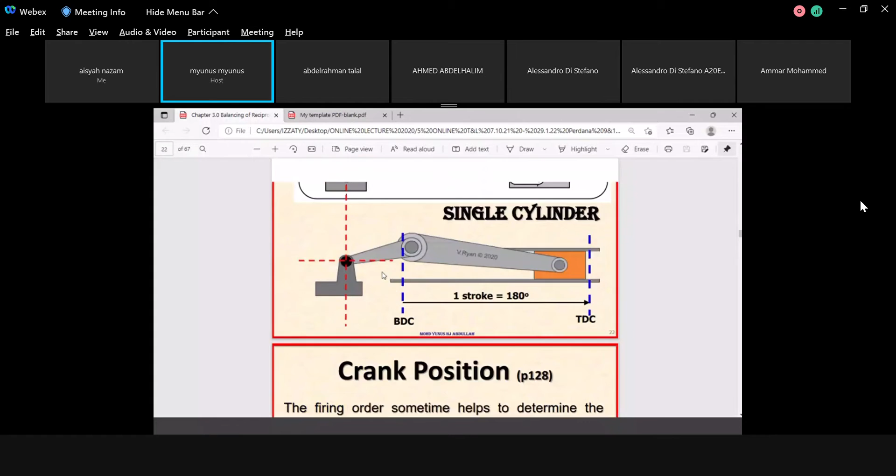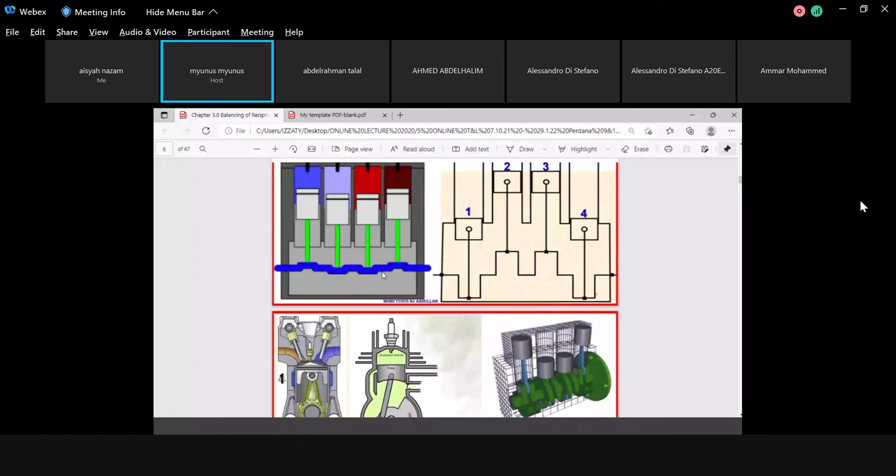This one, yeah. So before we pursue this one, as usual, I'm going to share with you, or recapture the thing that we studied last meeting. So what I intend to share with you is the whole thing that we are going to talk about, until the solution or the example, how to solve the problem. So I'm going to start with this one just to recapture the thing here so that you can refresh what we studied earlier.

Okay, so we are basically talking about the inline engine. Our aim now is to check whether the engine is typically balanced or not, and we are going to focus on the inline engine first. The next couple of lectures we are going to look at another type of engine, starting with the radial engine, and also the V engine.

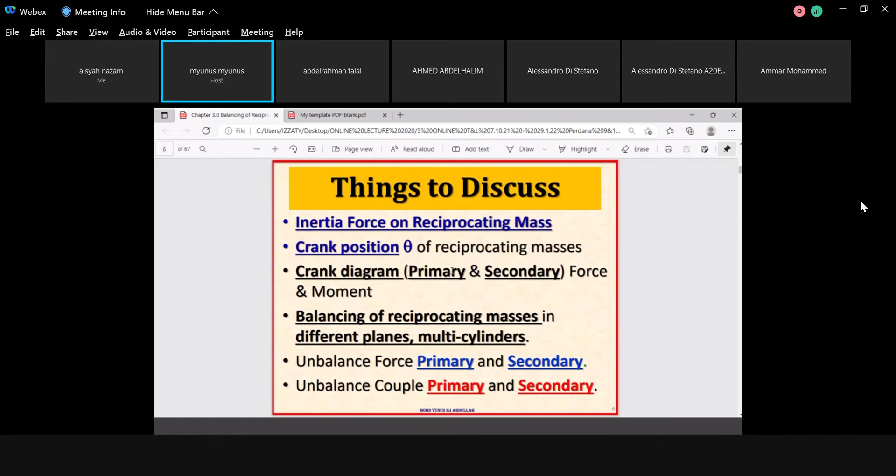Okay, I'm going to use my blank template here to basically discuss the things we already discussed. Okay, so we are basically in the middle of a discussion on the reciprocating mass, balancing of a reciprocating mass. This one is reciprocating mass.

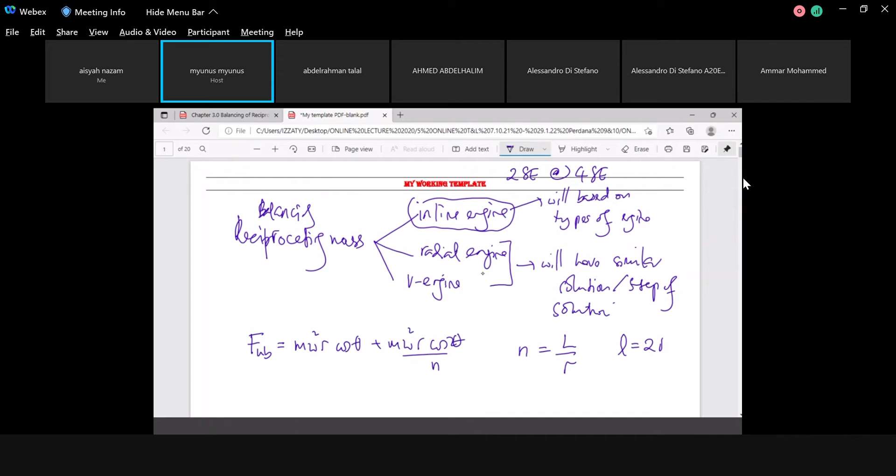Okay, so from this equation, you know that you have two terms. This one we call F primary, equal to M omega square R cos theta. This one we call F secondary, equal to M R omega square cos 2 theta divided by n.

Okay, so you have another one, because you're talking about multi-cylinder, for example. So you have this M unbalanced. This will be exactly the same here. You will have MRD omega square, sometimes I put R in front, sometimes I put R together with MR, doesn't matter. So MRD omega square cos theta, plus MRD omega square cos 2 theta divided by N. And here you have two parts again of the equation, this one and this one.

We call this one M primary, isn't it? M primary, sometimes M can also be known as moment, sometimes couple. So your M primary is equal to MRD omega square cos theta. Here we call it M secondary: MRD omega square cos 2 theta divided by N.

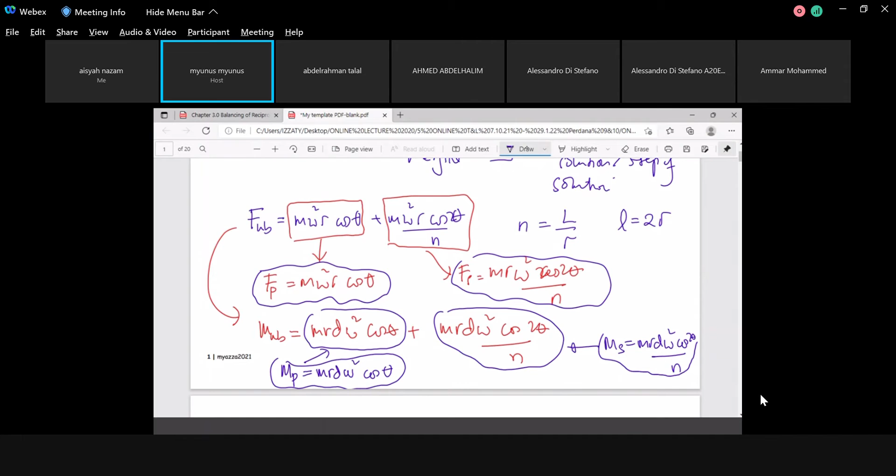So if you look very carefully, you have 1, you have 2, you have 3 here, and finally you have 4. So you have 4 equations. So the solution will deal with 4 polygons.

Okay, 4 polygons. If you want to do it analytically, you have 4 major equations. How do you write it? 4 major equation.

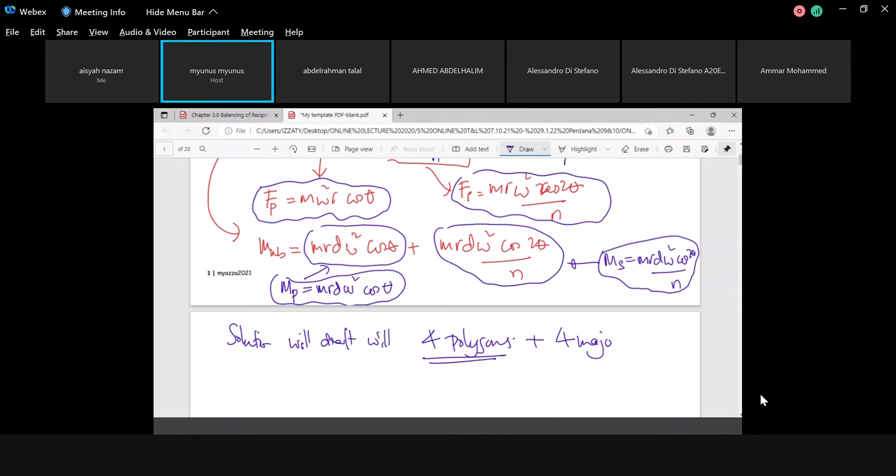Okay, so I'm going to talk about what the polygon is at the moment. So the polygon will be the polygon. You have one will be what you call the primary force polygon. Then you have primary couple. This one you have another one, secondary force. Then you have secondary couple.

You have 4. This one, of course, versus theta, versus 2 theta, because sorry, both are versus 2 theta. Sorry, I stopped momentarily. This one is versus theta also. This secondary will be versus 2 theta. This one versus 2 theta.

So we need to know or perhaps define what theta is. So theta is crank position. Okay, crank position.

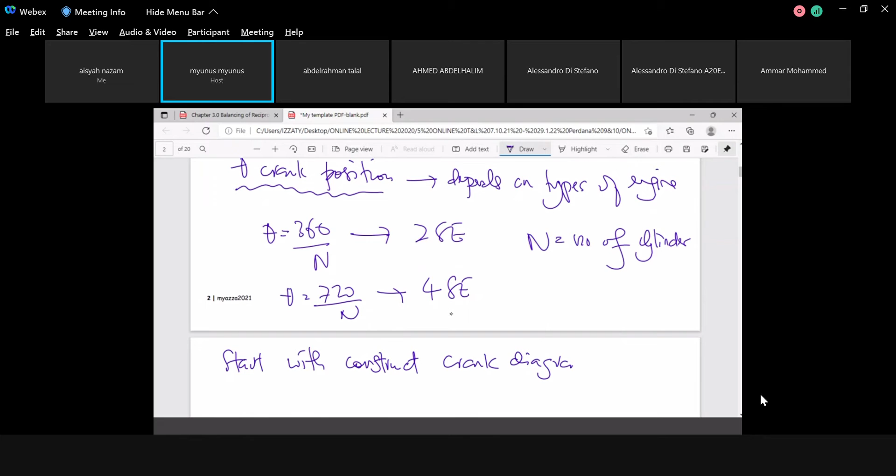So when you understand this, then the next thing will be very simple. So then we start with, remember, we start with constructing one crank diagram. This one is compulsory. Put it there, compulsory, it's a must.

Okay, so before you construct that crank diagram, you need to know something. What do you need to know? Remember, anyone? What do you need to know before you construct the crank diagram, class? Anyone? I think everyone attended the lecture last week. It is not very far, only last week, isn't it?

Yes, correct. You need to know FO, firing order. Again, firing order is also compulsory. You need to know, it's compulsory. If there's no firing order, for example, then what do you have to do? You have to design your own firing order. How to design? I will discuss or share with you later on.

Okay, now, so what is firing order? Firing order is basically the sequence of power being delivered. Sequential means you have four activities. What are the activities? These are the activities for internal combustion engine. Yeah, what are the activities?

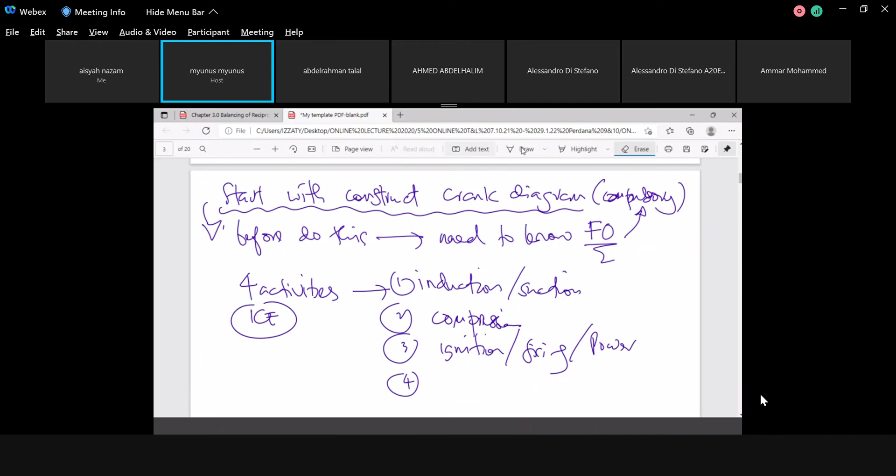Compression is correct, combustion is also correct. Number three, then this one, ignition or firing. Then number four, this one, you have power, oh sorry, ignition or power. This one, exhaust. This one is combustion. This one is exhaust.

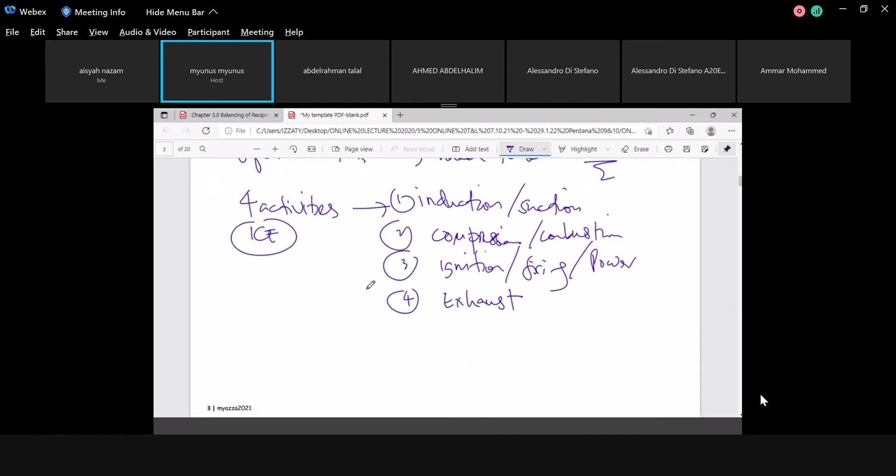Okay, so these are the four activities in the internal combustion engine. So now you already know what firing order is. So who decides the firing order? The engineer, or perhaps the person who designed the engine, is the one in charge, or responsible to decide the firing order.

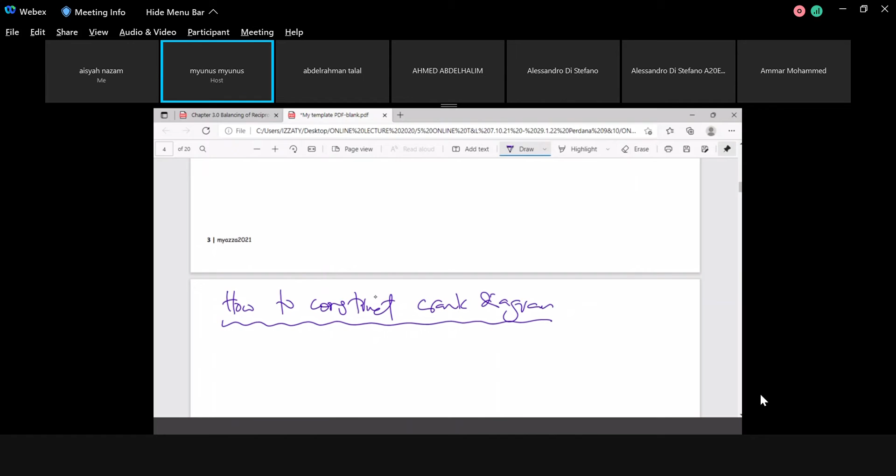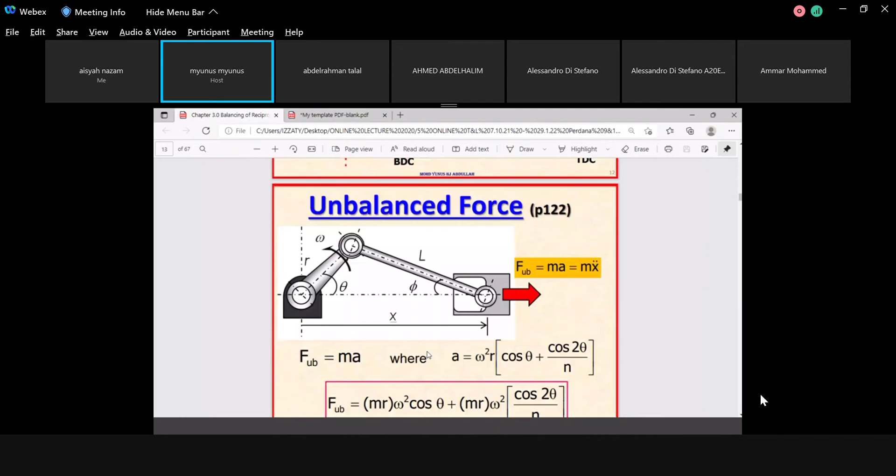Okay, now then we start with what I'm going to share with you now, how to construct the crank diagram, because this is very important. Okay, let's assume you go back to your notes. Let's assume that everything I explained here is in your notes. Yeah, don't worry if you didn't copy it, it's still okay. Just check your notes. Let's assume that you have it as such.

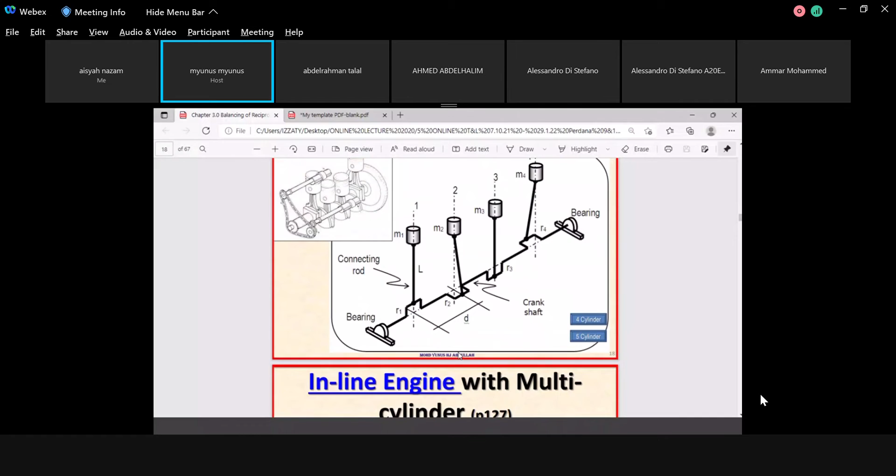You have this one on page, in your slide, slide 27, 28, 30, 31, this one.

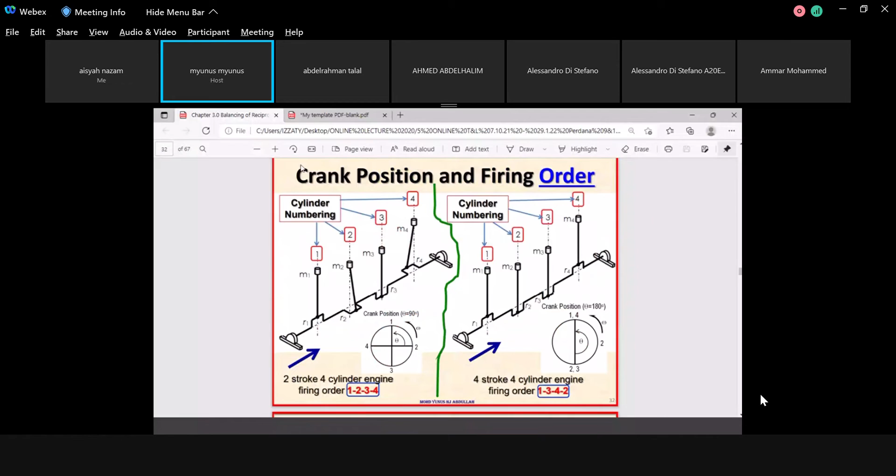We have 4 slides in one page because I tried to give you one page for one file, but it can't make it because the file is so huge. So you have this one.

So this is by firing order. Assuming this one, let's assume you have 2-stroke. Let's assume this is the given 2-stroke 4-cylinder engine. Firing order 1, 2, 3, 4. Don't bother about the firing order, because this firing order is given, or if it's not given, then you design it. How to design? I will explain to you later. So we have 2-stroke 4-cylinder engine with 4 cylinders.

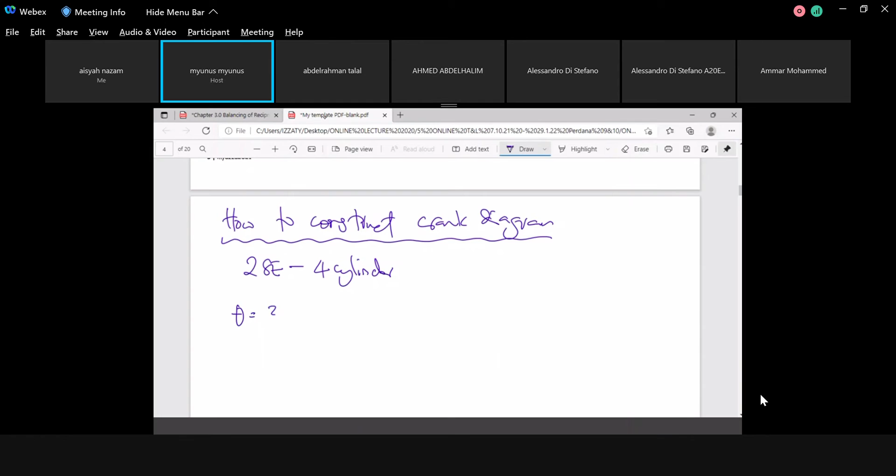So what you have, theta now is equal to 2-stroke 360 divided by 4. You will have 90 degrees. What does this mean? It simply means that if you have 4 cylinders, cylinder number 1, cylinder number 2, cylinder number 3, cylinder number 4, the arrangement will be 0, let's assume the arrangement be 0 here, 90 here, 180.

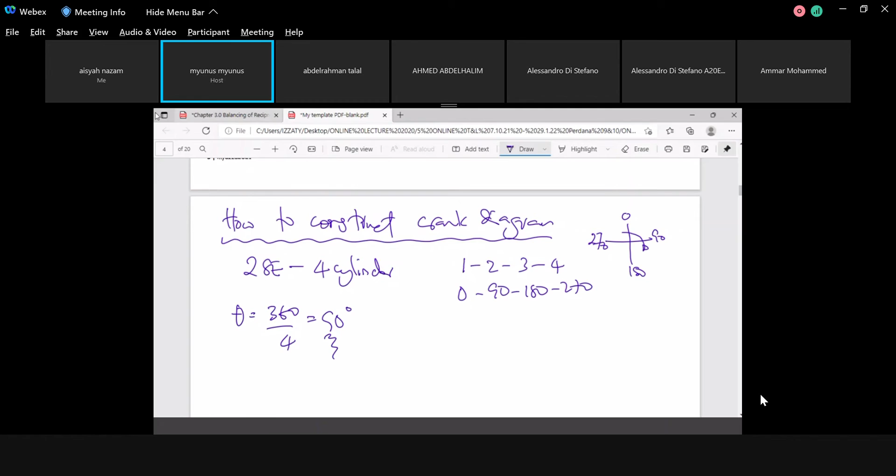This one is 270. Clockwise from the vertical, you have 0. The next one is 90, isn't it? So you have this one 90. The next one will be 180. The next one will be here 270. Am I correct or not? Yes or no? So that is the arrangement.

But this one is based on the crank. So the position will be as such. This one, look here, 90. Correct? 0 degrees, 90. This one is 180. This one is 270. If you look at from one end here, you will have this one: 1, 2, 3, 4. Am I correct? 1, 2, 3, 4. So that will be the arrangement.

So it's rotating clockwise. Why is this one our concern? Remember, when I show you the firing order, you need to know what the direction will be. So let's go back to the firing order.

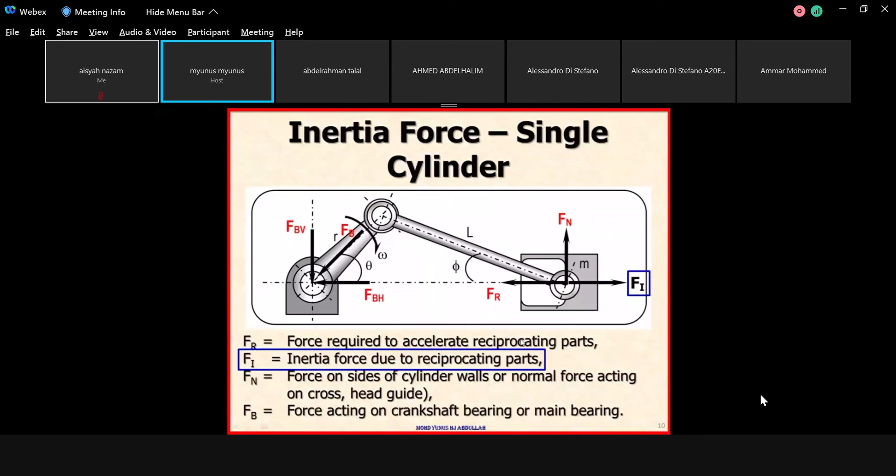If some of you might not have observed about the firing order, I'm going to share with you about the firing order. I'm going to open up the file and share with you the direction for the firing order. Remember, it's very important to know what the direction will be. If the direction is not given, for example, you need to decide on your own.

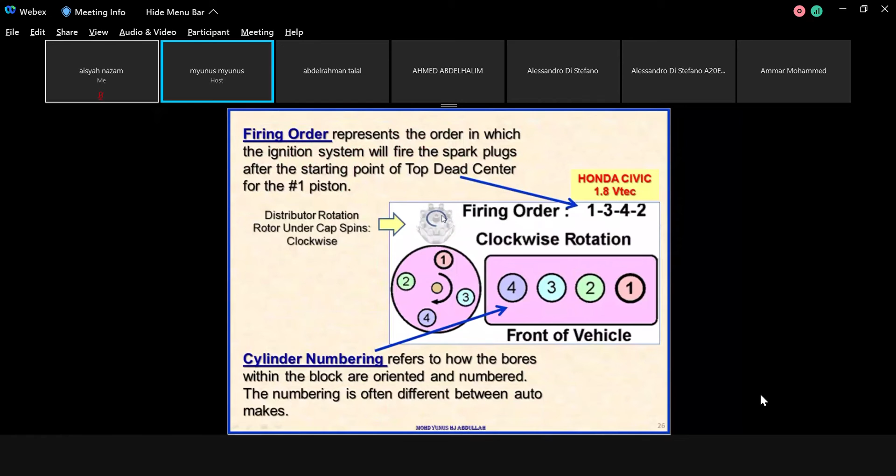Yes, doctor. Okay, look at here. This one also clockwise, the other one counter. So this is the direction. The direction must be given. If it is not provided in the question, for example, you have to make your own adjustment.

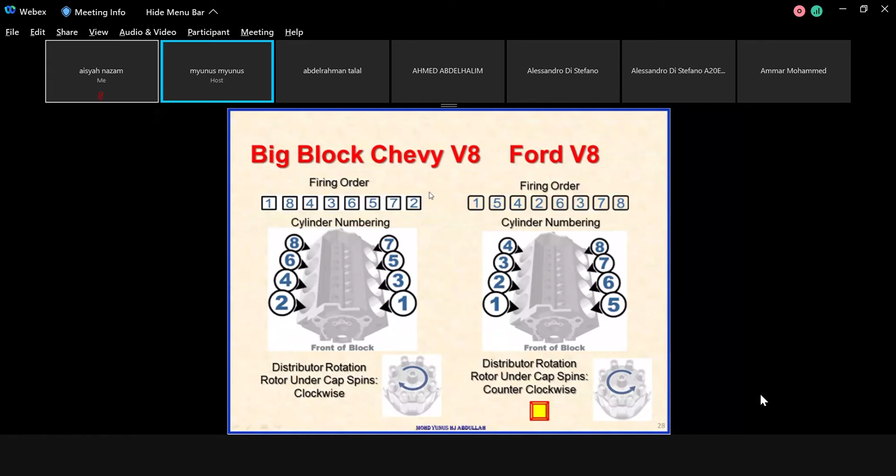I'm going to close this file and open up the other file so I can write on it. Okay, now, so perhaps it mentioned about rotating counterclockwise from your seat. So this will be the arrangement: 1, 2, 3, 4.

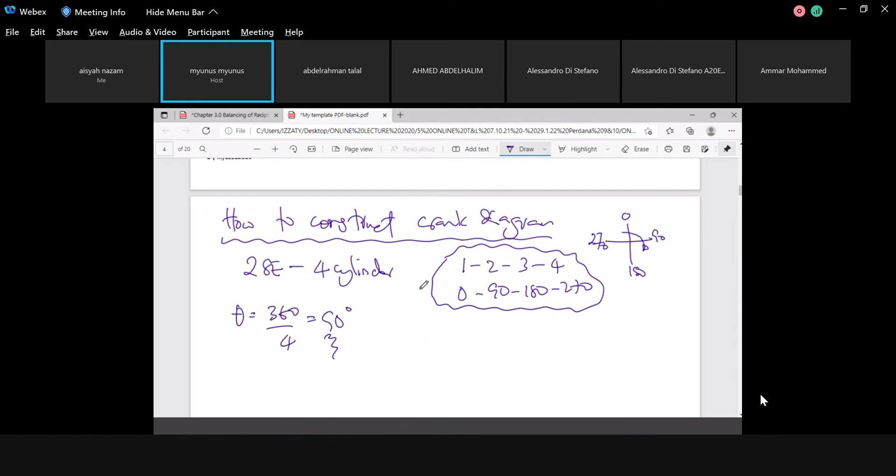Okay, so we go back to here. So supposingly, this one, you will have the crank. Somehow or other, you know that the firing order is also exactly the same: 1, 2, 3, and 4. So you have the same result.

This one, the firing order, yeah. So if you start with here 0, this one will be 90, this one will be 180, this one will be 270. So you can also put notation or a sign on your crank diagram: 1, 2, 3, 4, rotating counterclockwise from your seats.

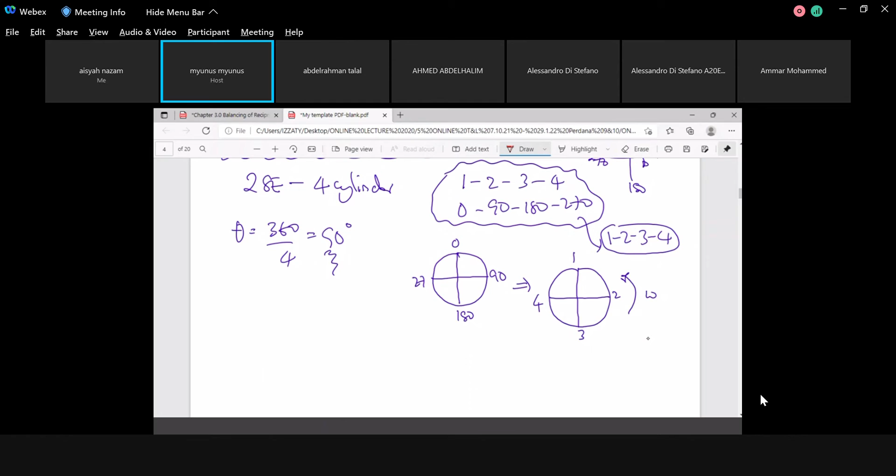So my equation, this is my equation now. Supposingly I change the omega, I'm going to put it here. 1, 2, 3, 4 just now, this one. Could anyone tell me what will be the firing order now?

Now I'll change the direction. So could anyone tell me what will be your firing order now? Anyone? So this will be the firing order. If you have this one, for example, because I changed the direction now, what will be the firing order now? Anyone?

Could anyone? 1, 4, 3, 2 is correct. It's 1 here, isn't it? Then this one to 4. Oops, sorry, I say 4 but I write 3. Sorry guys, this one here is 4, correct? The next one coming is 3. The next one coming is 2.

Okay, it's still 90 degrees, isn't it? It's still 90 degrees, 90. So this one is 90 degrees, 90 degrees, 90 degrees. Okay, so it is not very difficult. It is not very difficult.

So if you construct, for example, this one is not in our discussion. Let's focus on this one because this is not in your notes. It is correct, but not in your notes. Your notes tell you about this one. So if you have this one as such just now, 1, 2, 3, 4, rotating that way, so if you construct a polygon, for example, what do you have now?

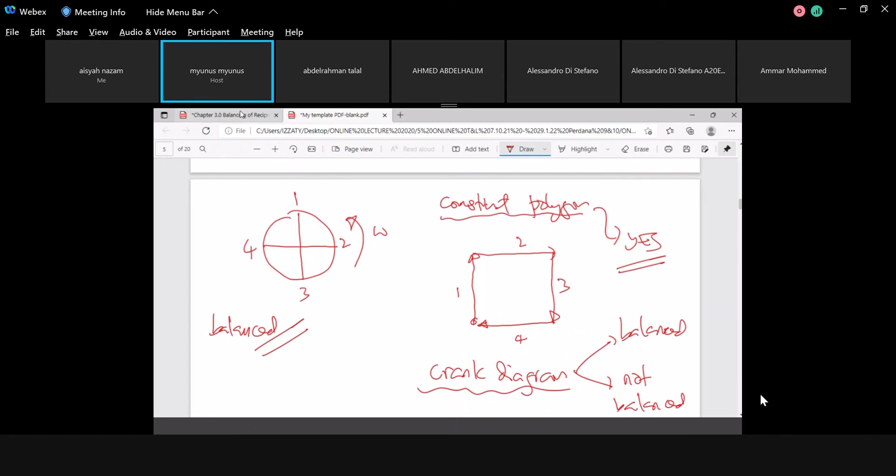This one is balanced. Okay, so you go to another one. This time around, you have a 4-stroke engine and 4-cylinder.

We go back to here. The next one, you have a 4-stroke engine. Let me change the color here. So you have a 4-stroke engine with 4-cylinder. So theta now is given by 720 by 4, so you will have 180.

So the arrangement will be the polygon. Oh sorry, it's not polygon. The crank diagram is not the polygon yet. Yeah, it's a crank diagram. So the crank diagram will be... let me change another color here. Okay, so the crank diagram will be the crank diagram now.

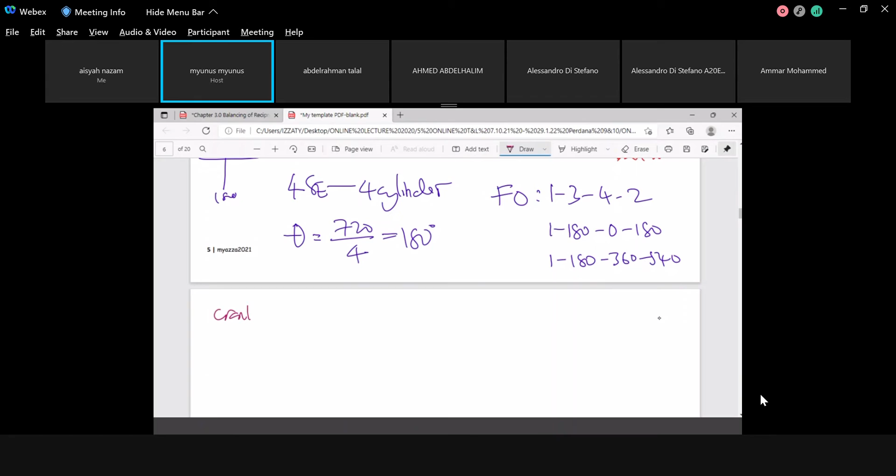So how is it? You have the crank diagram. Okay, then you have 1 will be here. So you put it here, zap, this one 1, your reference just now. This one is 90, right? So put your reference now: 0, 90, 180, 270. So you have 1, 180, 360, 540.

So you have 2, you have 3, sorry, you have to follow the firing order. So the firing order gives us what? 1, 3, 4, 2. So this one is 1, 3, 4. Correct or not? Correct or not?

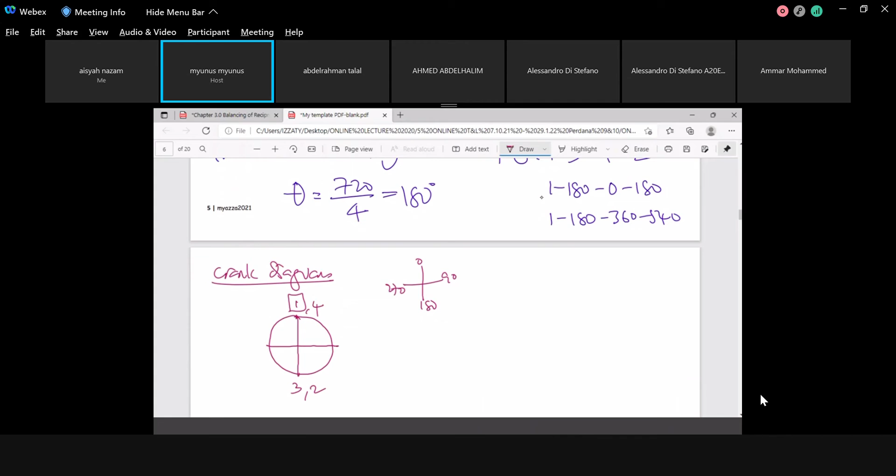And it's rotating what? So when will be the rotation now? So that is important. Clockwise or counterclockwise, class? My order is 1, 3, 4. So clockwise or counterclockwise? Hello? Anyone? No one interested to answer. So does it rotate clockwise or counterclockwise?

Counterclockwise, correct. This one is omega. Put it there, omega. Okay, now finished.

Let us now focus on this one. So how will be the position for the actual engine, or I mean the crank? So you are looking for one end here, so your eyes are here. Let's put it a bit thicker. So if you look at this, you found this one is 0 degrees, isn't it?

So the next one is what? The next one is 3 here. The next one is 4 here, isn't it? The next one is... okay, so 2 and 3, 1 and 4. Does it balance? Yes, it is balanced.

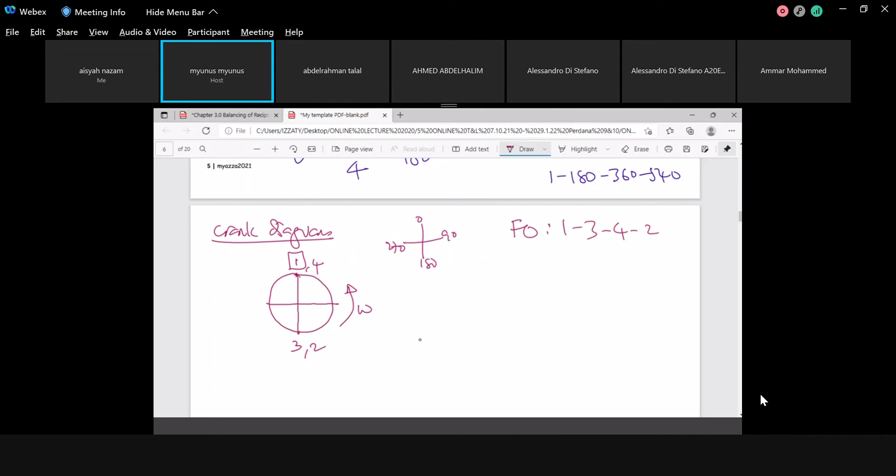So if it is balanced, how will your polygon be? We can start here. Your polygon will be 1, zap, start in the middle here, isn't it? Then number 1, then you have two choices. Let's say you have two choices. You can put here 1, quite a bit longer, yeah. 1, then you have another one, 4.

So then what you have is 3 will be pointing downward, 2 will be pointing downward, and it is balanced. Put it there, balanced.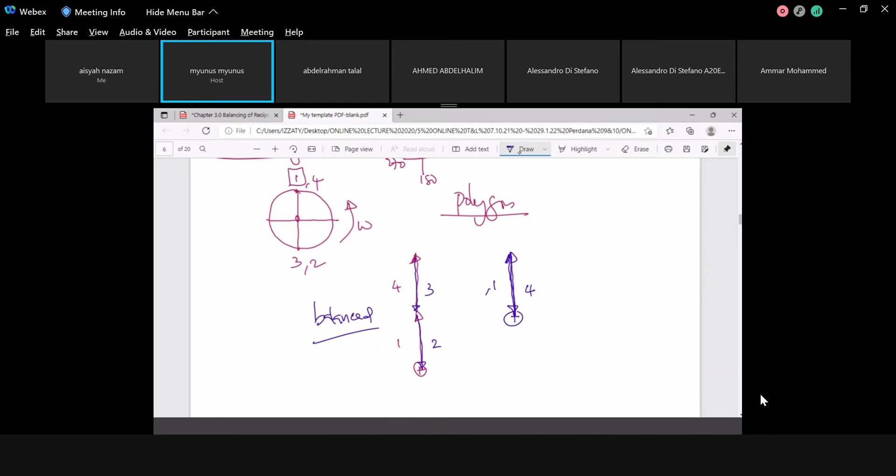Or it can also be in the form of starting point 1, then is 4, 4, then is 3, then is... okay, so now my polygon is also balanced.

To ensure that the one who checks your work understands what you're doing, don't do this one. The reason is, the minute you keep drawing on the same line, after all, if you have 20 cylinders for example, your paper will tear, isn't it? So what you have to do now is this one, which is correct.

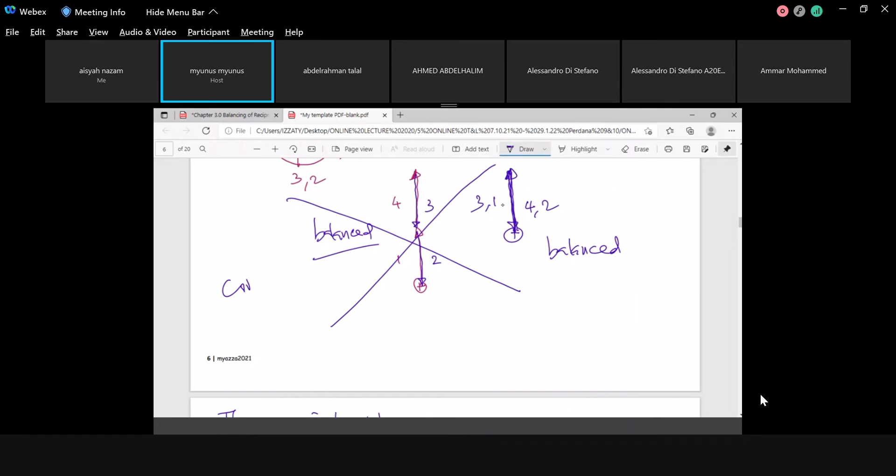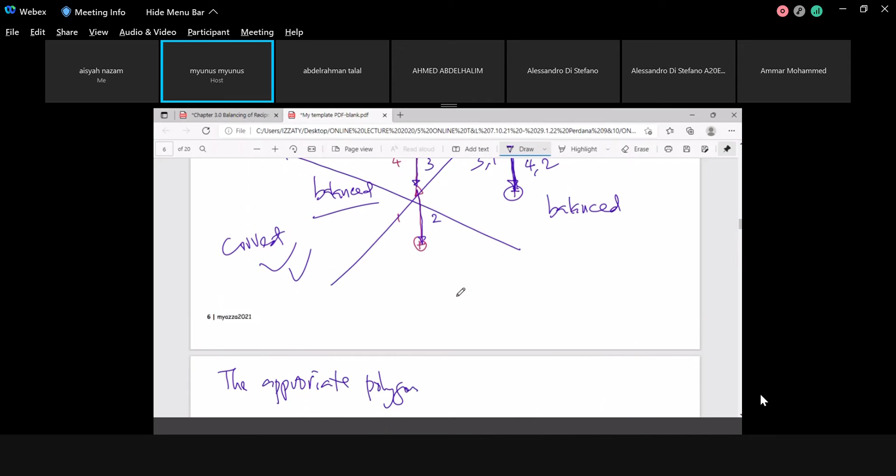I'm not saying this one is not the appropriate polygon. It is correct. But the one checking your work will find it looks so messy. If you have 16 cylinders for example, the appropriate polygon will be this one.

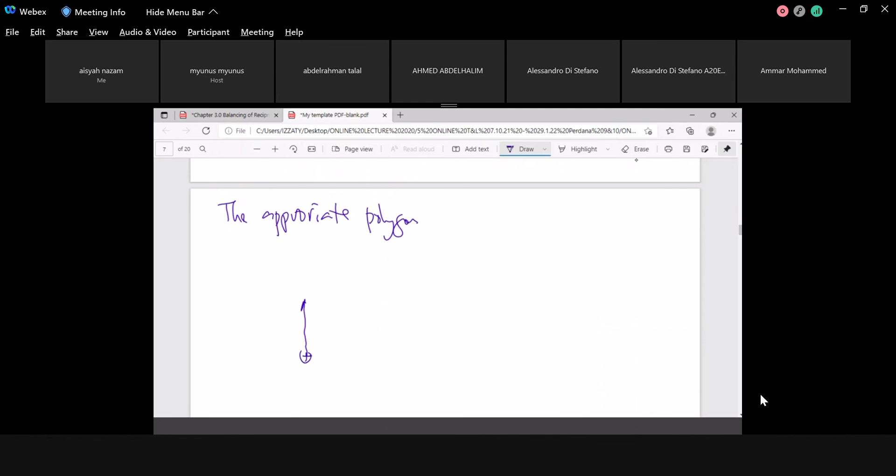Starting, number 1, number 4, then put it here, number 3, number 2. Even though these two lines are overlapping or superimposed on each other, you have to create it this way to ensure the one correcting your work understands. Or perhaps you can also do it another way: 1, the next one will be 3, go back here number 4, then this number. Both ways work, so you can choose either one.

It is called polygon. This polygon is not what you learned in secondary school. The polygon you learn in secondary school is different. What does the teacher tell you? Polygon must be at least what? What do you know about polygon?

Terminology - what do you understand by polygon? I don't want you asking whether this is basically not a polygon. Can anyone tell me in terminology what polygon means? At least what? You must have three lines. That is a polygon, isn't it?

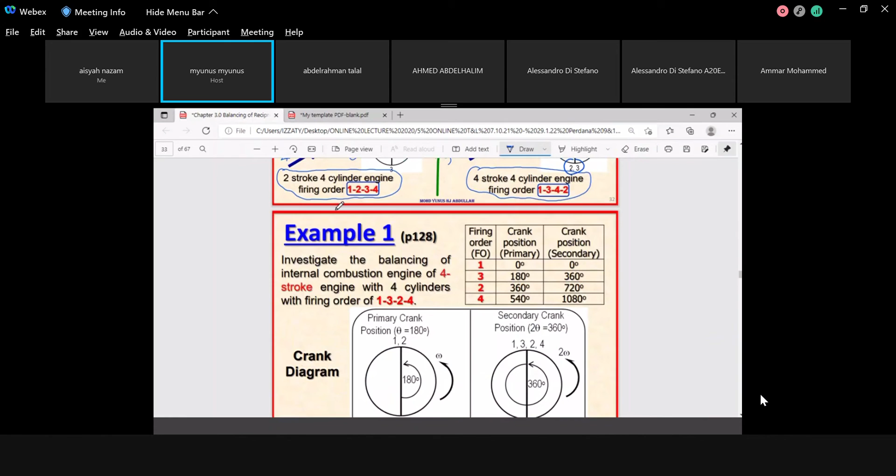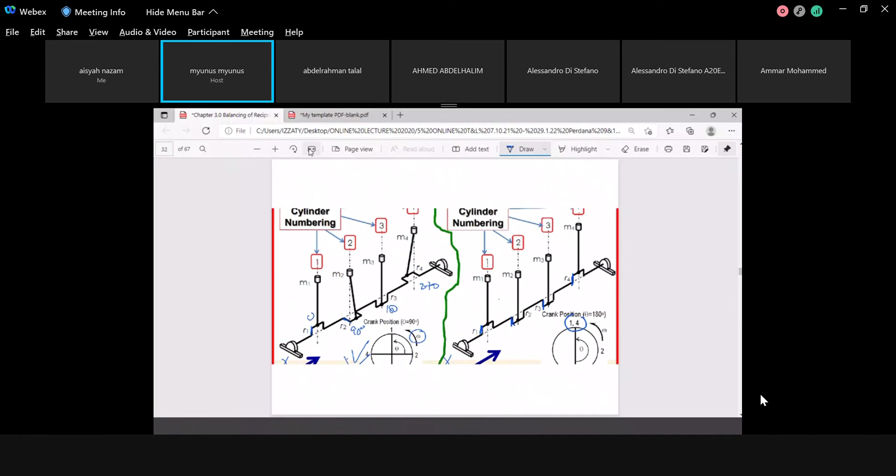This one is nothing much, you can put it in the form of a table. This is just to share with you how to construct the crank diagram. Now I'm going to construct this one again, but applying primary and secondary. Don't go to this one first - I'm going to share with you what happens with primary and secondary.

Start here. Listen up very carefully. We have a two-stroke engine, four-cylinder. We already calculated theta equal to 360 divided by n, and this is 360 by 4, which gives you 90. The firing order provided is 1, 2, 3, and 4. So you know all these are 90 degrees apart, and let's say the position is this one.

So how do you construct it? The crank diagram will be, look at here - this is the crank diagram. Remember the crank diagram just now? You have force, yeah, force primary. You have force secondary. We have another one for couple - also same thing, primary, secondary.

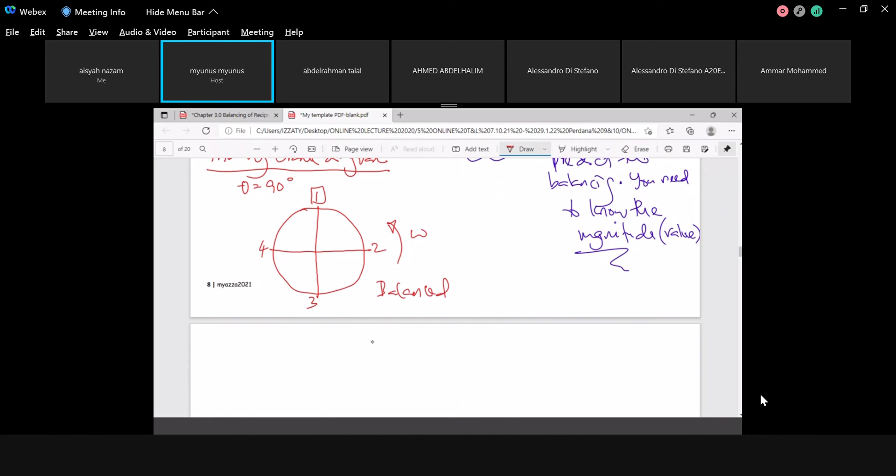Polygon you can construct on your own. For secondary, now secondary force.

So 2 theta is equal to 180, because the earlier part is theta, since we are talking about the primary. When you move to the secondary, it becomes 2 theta. The reason is if you look at the equation, F secondary is equal to mr omega square cos 2 theta divided by n. This is cos 2 theta due to secondary. The primary one, F primary, is equal to mr omega square cos theta.

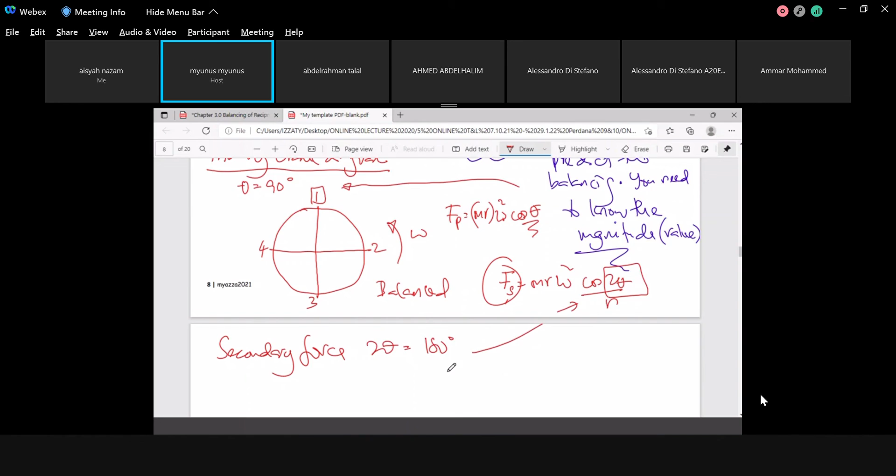That is, we have this one. This one will be theta. Okay, so how will be the polygon?

Same. This one is no longer omega, it becomes 2 omega. Then you have this one, what you done earlier. Cylinder number will be your reference. Now if you are talking about the firing order just now, 1, 2, 3, 4.

So now it's 180. The position for each crank will be 180. So if you start with 0, for example, so you will have 180. You will have another 180 is 360. Another 180 will be 540.

Isn't it? Yes or no? Yes or no? Yes, anyone? Could anyone else? Thank you, thank you, Tal.

So now, so you will have 180. If it's not 180, yeah, it's not 180. It is crank number 2. Crank number 3 will be here. Crank number 4 will be here.

And it is also balanced. So you have F secondary equal to 0. Your F primary also equal to 0. Your summation of F equal to 0. So there is no unbalanced forces acting on the engine.

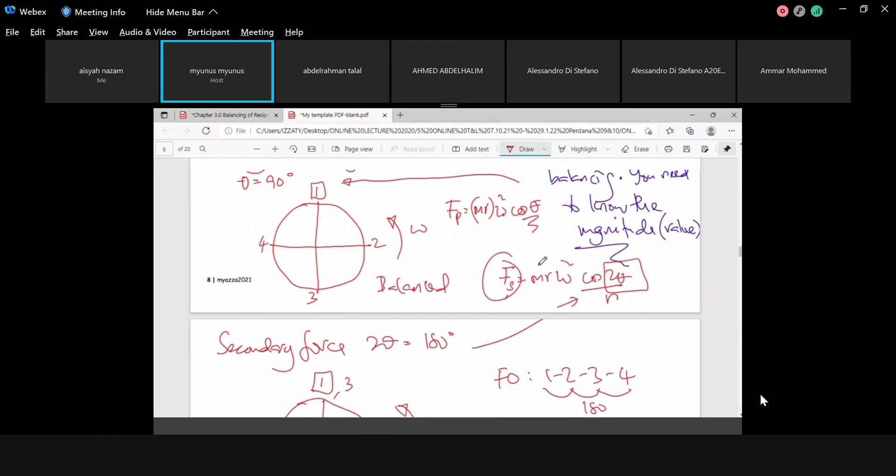Okay, so let us now make another one. This one, yeah, this one 4-stroke, 4-cylinder, of course. Your firing order is 1, 4, 3, 2. Am I correct? Put it there. Sorry, it is 1, 3, 4, 2.

Okay, so now the theta, as we done earlier, is 720 by 4, which gives you 180, right? And the firing order is this one. So everyone will be positioned at 180 for primary. So for primary, for example, you can start constructing a table.

This one is theta, this one is 2 theta, this one be your cylinder, or put it there, not cylinder, you can put it by firing order. Firing order, put it there, cylinder, firing order. What you have is 1, 3, 4, 2.

So for example, let's start at 0. Everyone will be 180 apart. You have one, you will have 180. Another 180 is 360. Another 180 you will have 540.

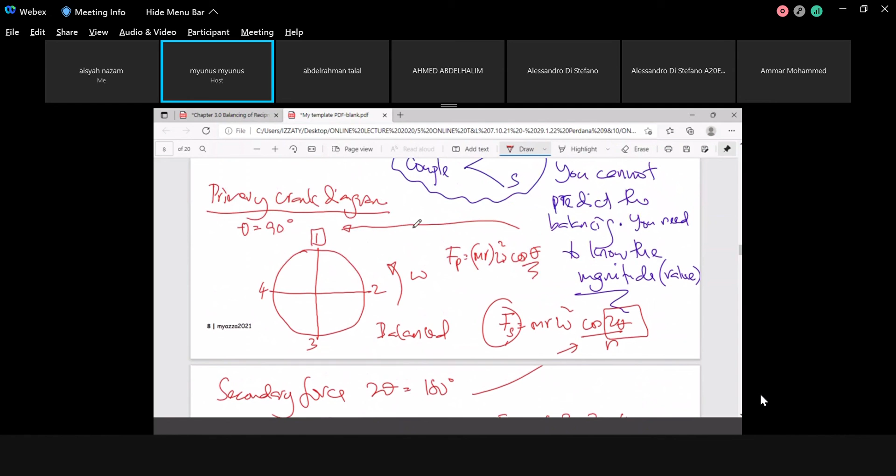So you will have it right here. Omega is this one, so one is our reference. So the position as what we have here just now, same position. No, 0 is at the vertical, top vertical, yeah. So you have cylinder 1, then this one cylinder number 3, then your cylinder number 4, then cylinder number 2, balanced, as what we did earlier.

Okay, so secondary now, secondary. So put it here, this one is theta is equal to 180. So put it here, secondary force. So you have 2 theta is equal to, now 180 is 360.

So polygon, this is the polygon. This one is 2 omega, cylinder number 1. And if you go back to this one, we have all zero. So what does it mean? So this is the center one. So we have this one will be cylinder number 3, 4, and 2. Because everyone pointing upwards, it is not upward, it's basically at 0 degrees. This one at 0 degrees.

Understand me or not? Is that clear, class? Hello?

Okay, thank you. Yeah, I have what? I have with me 52 candidates, or 52 engineers to be.

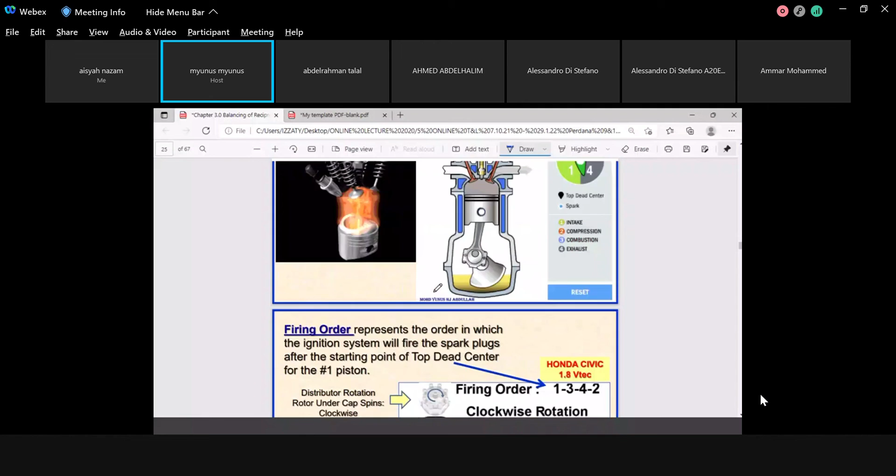If supposing you have a crank here, look at here. How to balance the second. If you crank here, so where is your... yeah, here. So if this crank be pointing that way, the crank, you have to put a mass here to balance the system or to balance the engine. Okay, for example.

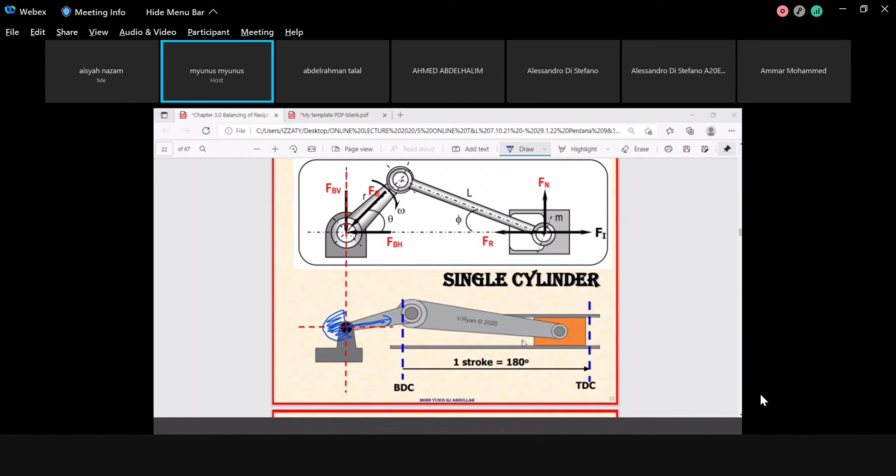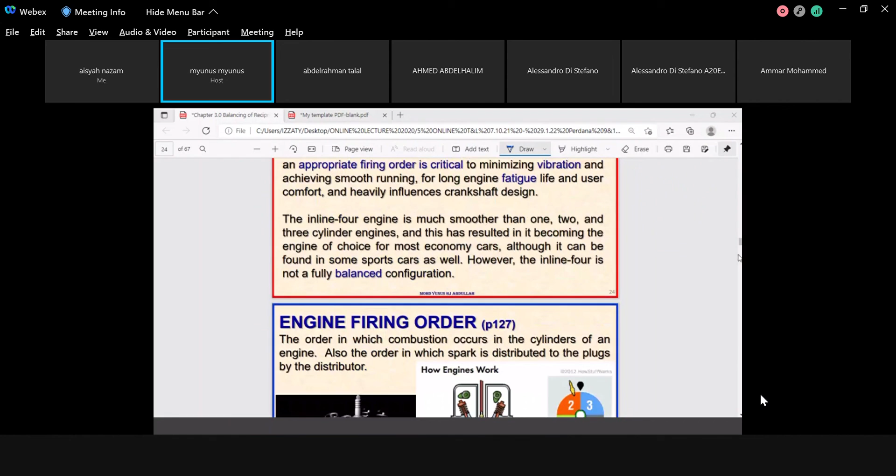Any question? Okay, now I'm going to move to the example, another example. This one is not very difficult. I already done this one, so this one is not balanced, pointing upward, not balanced.

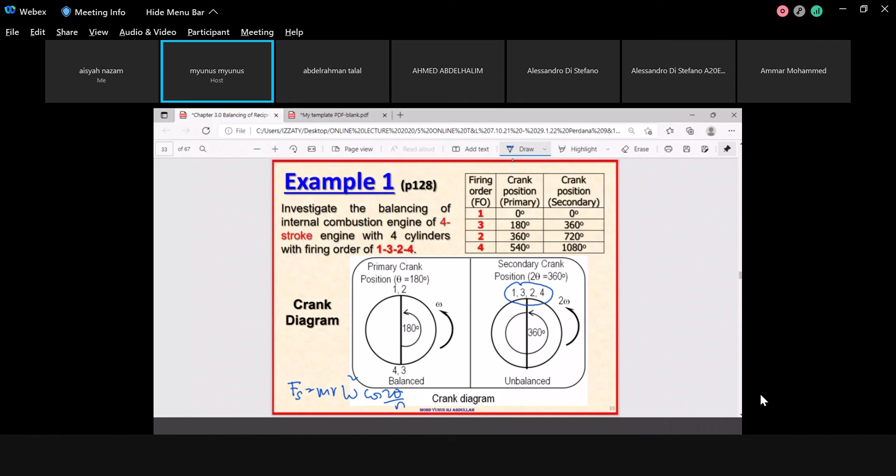So how much it is not balanced? We do not know because we don't have numbers. Remember what we do have here. We have F secondary, isn't it? F secondary is equal to... it's not MRD, it's MR omega square. This one is cos 2 theta by n. This 2 theta is the position.

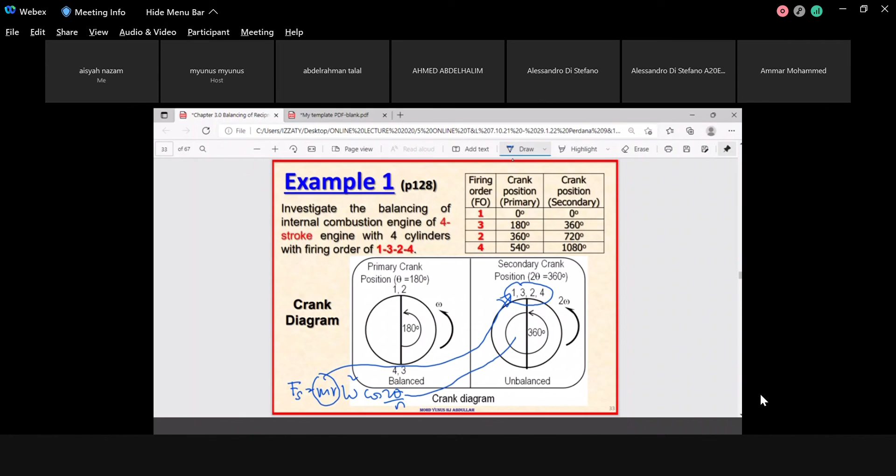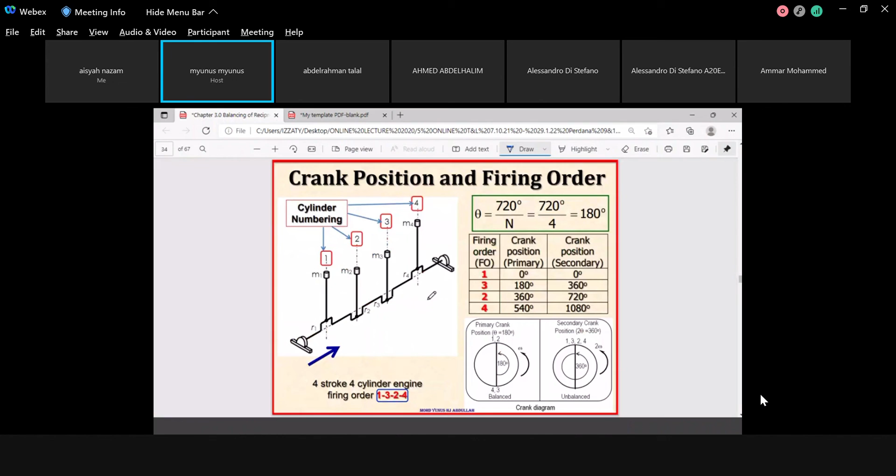Okay, now let's start another one. This one also I done earlier, I'm not going to do this one. What I intend to share with you, to ensure that everyone understands, is to move to this one: 6 cylinder. After this one, we make 8 cylinder. Today we're going to learn only crank diagram. It's very important to know crank diagram before we start doing the solution.

Okay, let's see now, investigate. They are asking about the investigate because we do not know what will be the magnitudes, just to say whether it's balanced or not. Investigate the balancing of the internal combustion engine, a four-stroke engine with 6 cylinders, of course with firing order given 1, 5, 3, 6, 2, 4. So the direction will be counterclockwise for your seats.

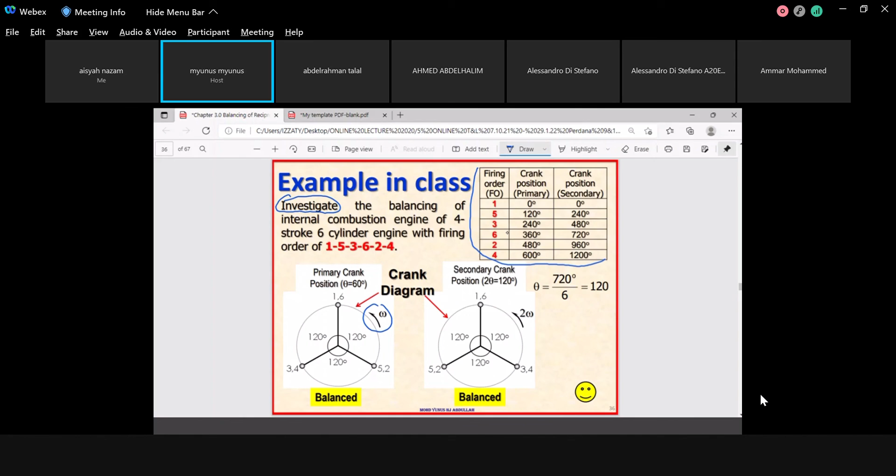Yeah, I'm going to solve this one. Okay, so now first, this is the option. You can put it in the graph, sorry, you can put it in the table, or you can also put it in, as I mentioned earlier, this one. Okay, everyone will be, remember, will be 120, 120. Either you can put this one in a table, or you can also put it here. Wisely, it's put in table because you know where you are basically when you construct a polygon later on.

So what I am going to share with you is 6 cylinder, four-stroke engine. Okay, now start with theta equal to 720, because we are dealing with a four-stroke engine, divided by 6. You'll be getting 120, of course.

And the firing order given here is, if I'm not mistaken, 1, 5, 3, 6, 2, 4. So we know that the position for every crank is about 120 for primary. Correct. And you have 240 for secondary, because we already understand that secondary is always twice or double of the primary.

So if you construct the polygon now, because we are going to investigate now, you start with what? Your equation is F equal to this one, yeah? Equal to M omega square r, or I can put it here, the standard equation saying it's M r then omega square cos theta. And we have this one, F, summation of... this one will be F primary.